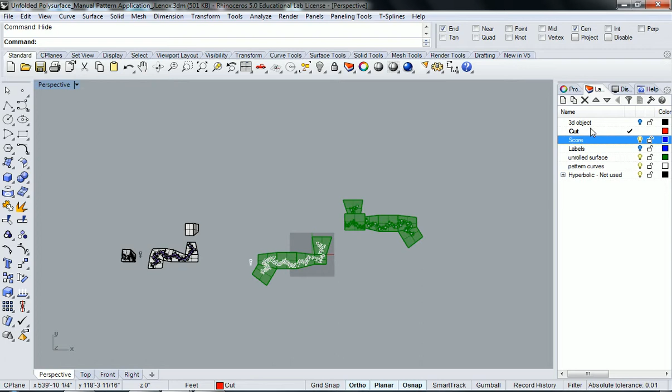And I'm going to select the red layer and I'm going to call it cut. And I'm going to select the blue layer and I'm going to call it score. So now in top view I'm going to take my unrolled surface and I'm going to duplicate the border. So the command is DupBorder, D-U-P, and then border.

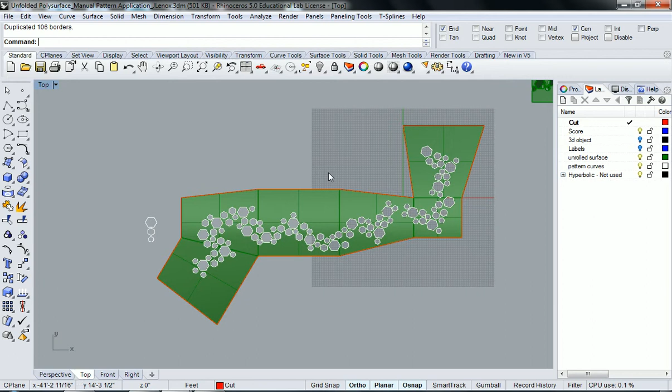And you'll see, if you're on the cut layer, that it'll send those lines directly to the cut layer, and you'll see that it outlined the profile. And it also outlined every cut split that was within it, right? Sure, I could do it again. So all I have right now is just my unrolled surface, right?

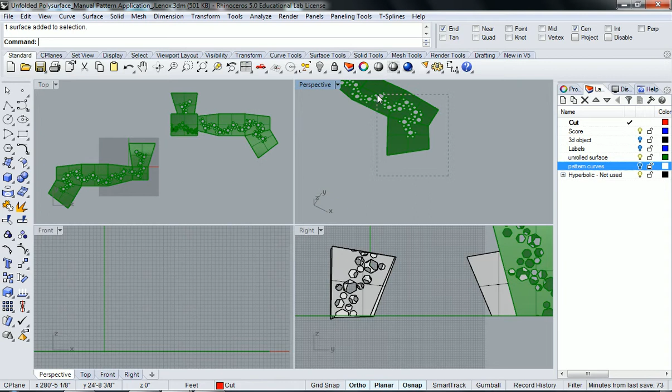And actually this one is the wrong direction. You can see that I had to rotate it and mirror. Actually I had to mirror it in order for it to work. And so I'm actually going to use the version that's the correct directionality, which is this one. So I'm going to copy that one to here.

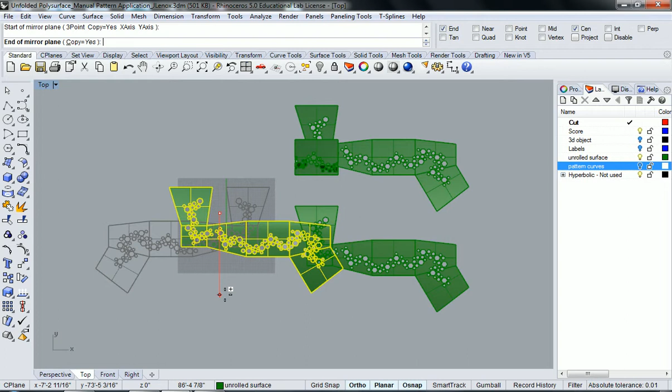So this is the one that it unrolled initially, right? I had to mirror it in the right direction here, like that, in order to get it to be correct. So that way when I folded it back up together, it folded correctly. So every time you unroll a surface, you should make sure that it's not the wrong direction and make sure to mirror it if you need to. So I'm going to use the actual one, which is this one here.

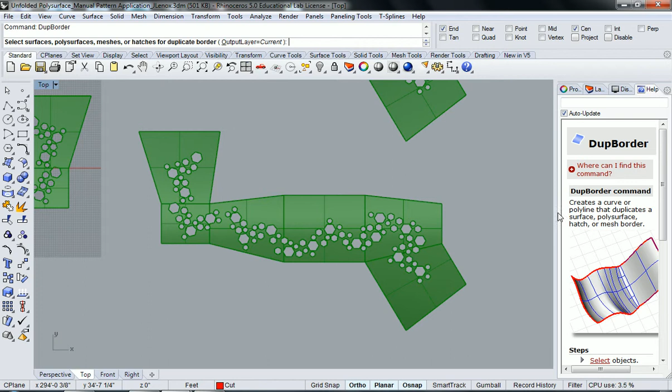I'm going to select my cut layer and I'm going to do the command. It's called DupBorder, and what it's doing is it's duplicating the border. Let's see if the help menu will explain to us here in a really simple way. So when you do this, it's going to take any kind of surface and it's going to create a line profile around the entire edge. And subsequently, if you have any splits inside of it, it's also going to trace those lines as well.

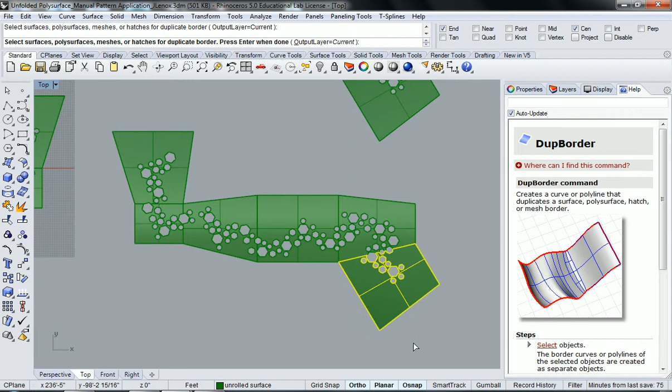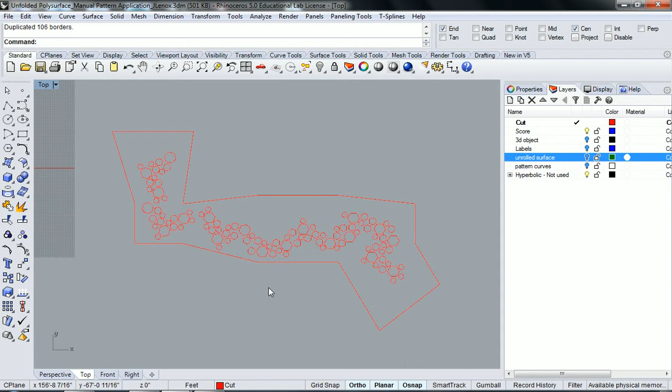So I'm going to go ahead and select this object. First thing I'm going to do is join all this together. Now I'm going to duplicate the border. So make sure to join it first so it's one shape. And when I go DupBorder, you can see it automatically draws all that information for you. And if I turn off my green layer here, you can see that's all it's given me. So it's given me the outline of the profile all together, and it's also giving me the outline of every single split that I had in my pattern.

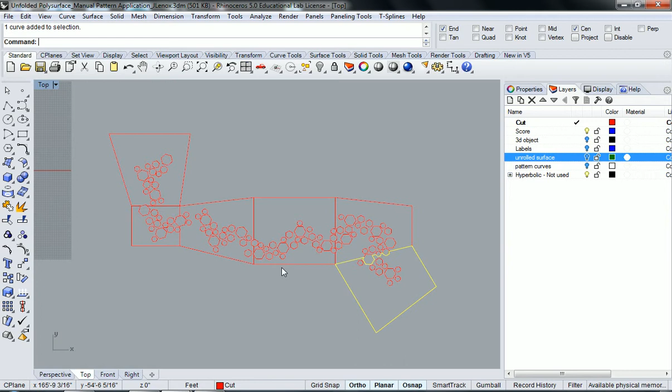Now I'm just going to go back a second, and if this was exploded and I did DupBorder, I'll show you the result. You'll see it's now made each one of these its own individual surface, right? Now this could be good if we wanted all these pieces to be individual, but the one thing to note is that this has a line here, and then this one also is going to share a line as well.

And so in the case of laser cutting, that's actually not as useful for us because we don't want everything to be cut. We want some stuff to be scored, which is essentially doing a very light cut that won't cut all the way through the material. So that way it gives us the ability to bend our material. So I'm just going to join them all back together again. And I'm going to duplicate the border. And so now that's all duplicated.

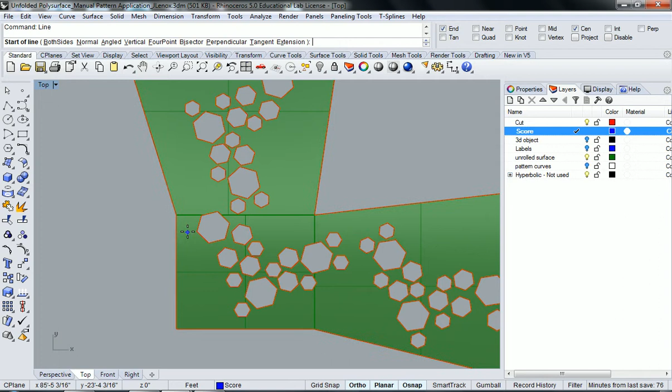And now the next thing we need to do is we need to draw in our scores. So our score lines are going to be essentially wherever we've rotated 3D, wherever there's a fold. So what I'm going to do is I'm going to manually go in and draw these. And I'm going to go from here to there, from endpoint to endpoint, and then from endpoint to endpoint, and I'm going to go ahead and do that on every single spot where we rotated three-dimensionally.

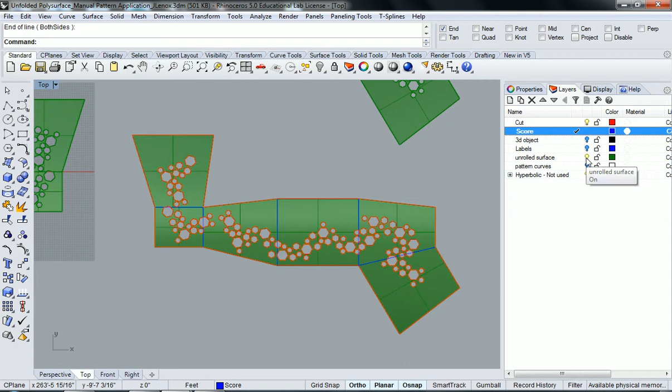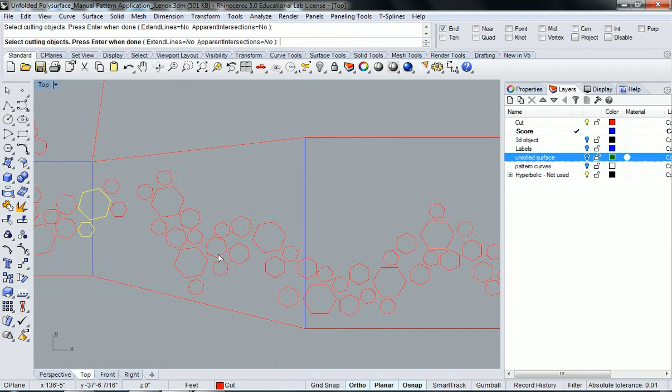And then now that that's taken care of, I can actually turn off my surface. And now we'll see that this score line is actually going through some of our objects here, right? And so the way to clean that up is to trim. So I'm going to type the trim command. I'm going to select cutting objects, which is going to be anything that crosses over that line. And I'm going to hit enter, and now I'm going to just go ahead and trim the blue away.

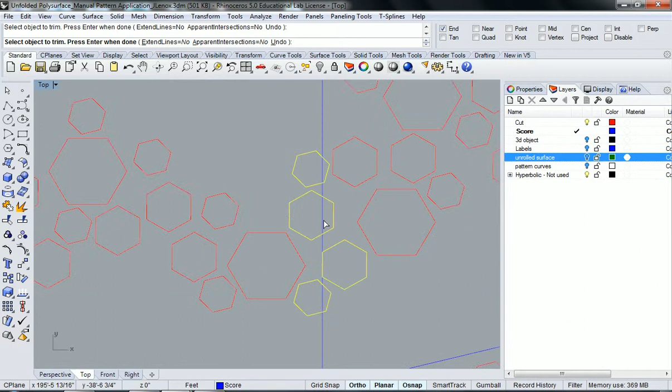And let's not worry about that. So now all I have is red and blue. And this has essentially set us up for our laser cut file. So when we put this file into the laser cutter and tell the laser cutter what to cut and what to score, it's going to cut the red and it's going to score the blue. And I will stop the video here and I'll explain what scoring is, just in case you're not familiar with it.